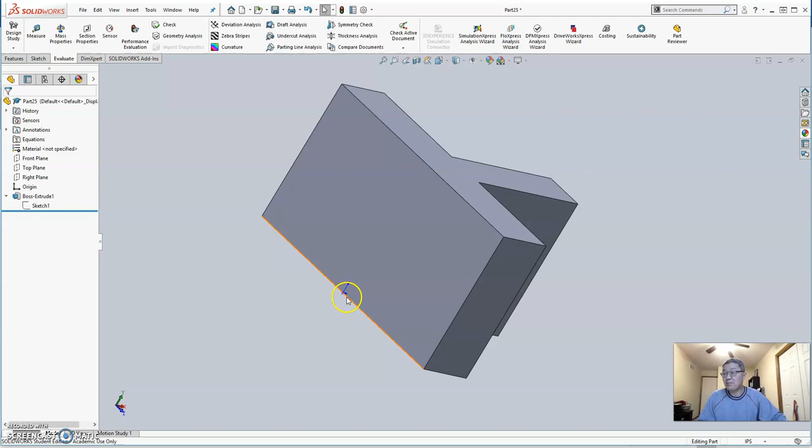This 2.7 is for us to draw this simple block part. As you can see here, the origin is right here, and if I rotate that, you can see the origin is right in the middle of the bottom plane. Once again, if you look at the different display plane type, we're going to choose hidden line removed, and I'll show the isometric view. So this is essentially the object.

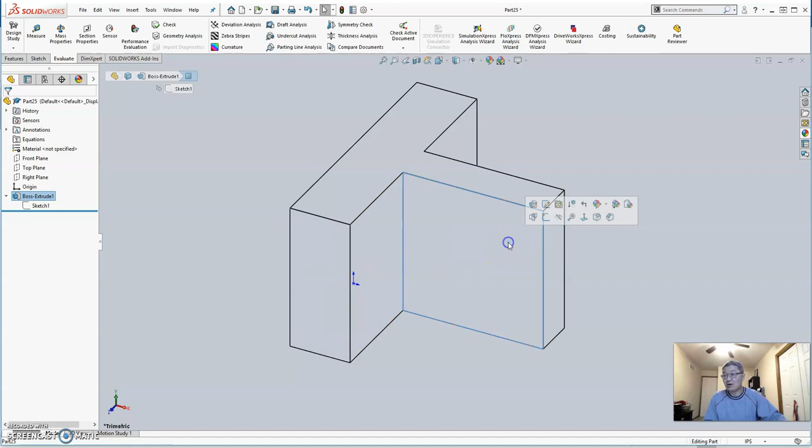In order to make this part, first we need to decide the primary drawing plane. For this one, apparently the top plane is the better one, because if you choose this top plane, all you need to draw this profile, then make one extrude downwards—actually you need to draw the one at the bottom and extrude upwards, so you finish the whole object. Of course you can use the front view, but you need to draw this block, then you need to draw this block, and draw two of them, making sure they're in the right place. So for this particular one, the top plane is a better option.

Let's click new, click part. As we decided, we're going to start from the top plane and make a sketch.

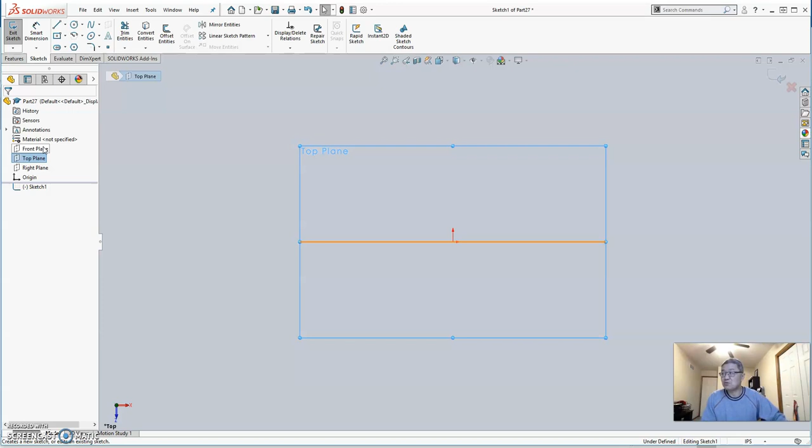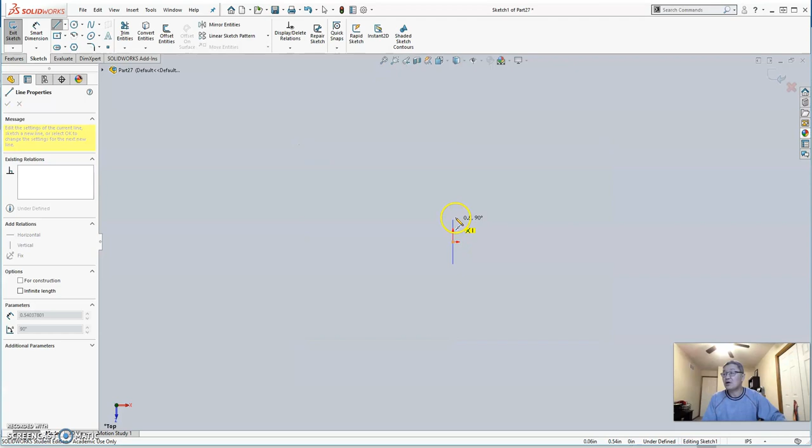Because the origin must be in the middle of that line in the back, if you recall, we're going to click the line command, but before that I want to click the downward arrow and choose this midpoint line, because this line will have a midpoint. We make sure the midpoint is on the origin. Click the origin, then go upwards. If you notice, when I go upwards it also goes downwards, because we chose midpoint line.

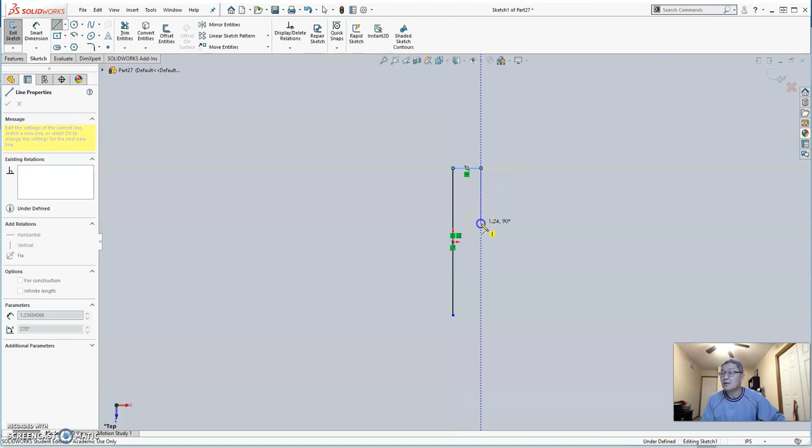Make a second click, then go horizontal, making sure the horizontal yellow bar is there, then go downwards and go horizontal, go vertical again, go horizontal, go downward again. Once again, at this point make sure this horizontal line also shows—that means we draw this point right to the right, then click this point. So we finish our sketch.

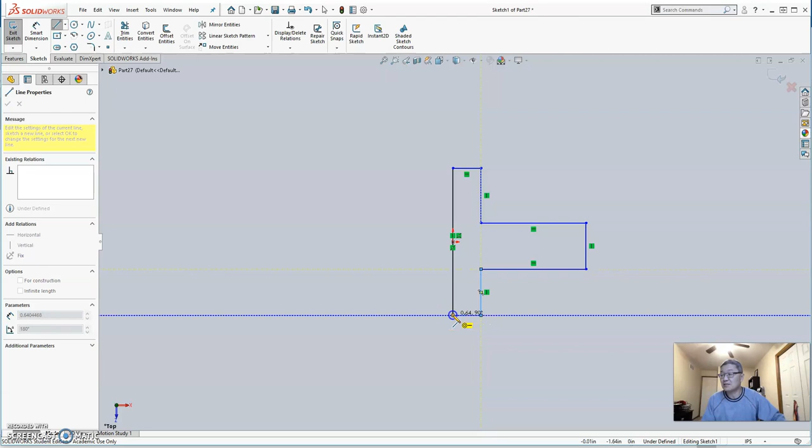Of course, we do not have a dimension yet. Now it's time to add a dimension. Let me use the smart dimension. The dimension for this line is 3.

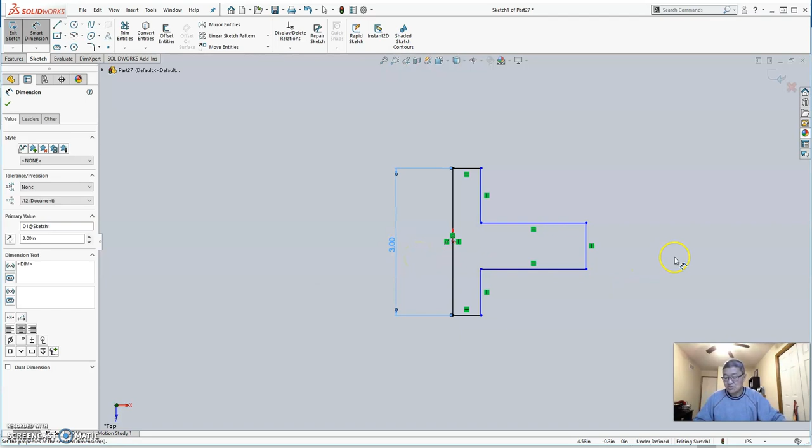And we also need a dimension for this one—it's 0.5. So what is the dimension for this one? We need a dimension for this one too, and keep in mind this object must be symmetric. So the length of this one should be the same as the length of this one.

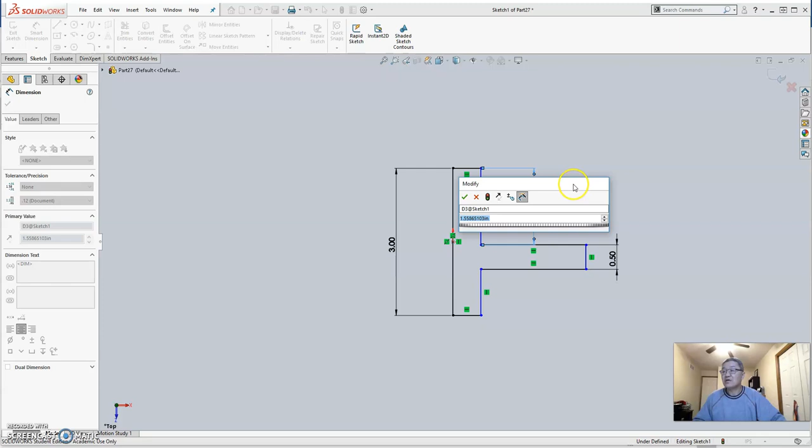So what I do is click the smart dimension, click this line, and put it over here. For this one I want to move this box a little bit upwards, so we're going to ask SolidWorks to do a calculation for us. The length for this one should equal half of this length minus this length. So I'm going to use an equation: put a parenthesis, click this dimension, then minus this number, click this dimension, put a parenthesis, then divide by 2—so that it's symmetric, that is half of the difference. Hit enter. So that's the dimension for that one.

Do we need to input this dimension? No, because we know the total dimension, we know this dimension, we know this dimension—I think we're good. Click the green check. So we're good to go.

Now we need to add another dimension. Use the smart dimension—I want to click this vertical line. We know the distance from here to this line; the total is 2.5. So we click smart dimension, click this line, then click this line, then move downwards.

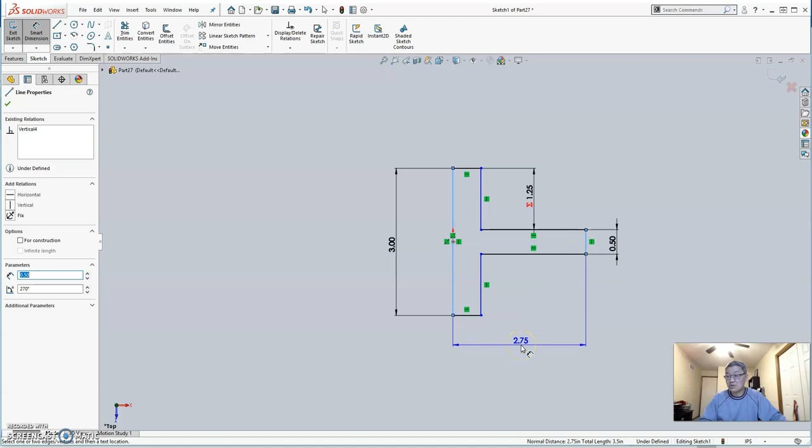So we decide the dimension for these two vertical lines. First click this dimension line, then click this vertical line, then click the second vertical line, then move downwards. For this one, the dimension is 2.5. Now we also need to know the dimension for this one: 0.75.

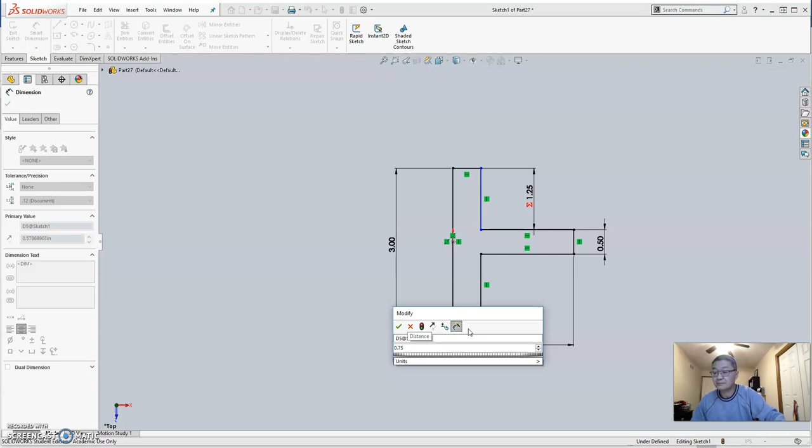If you notice it says undefined, that means we need a dimension for this one: 0.75. Enter. Now it says 'fully defined' in the status bar, so we're good to go.

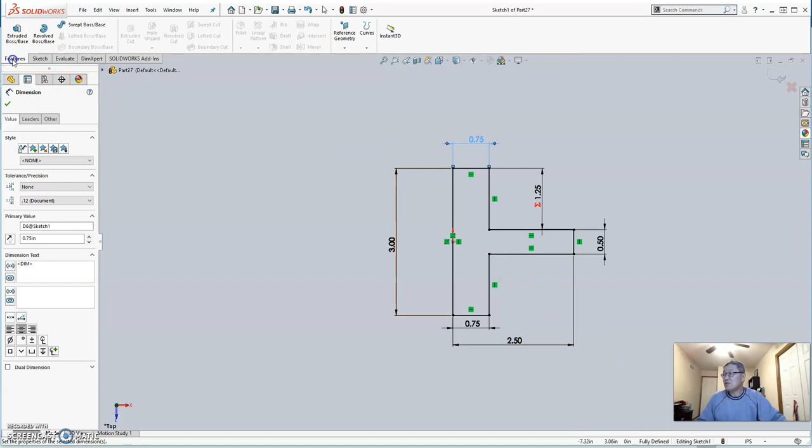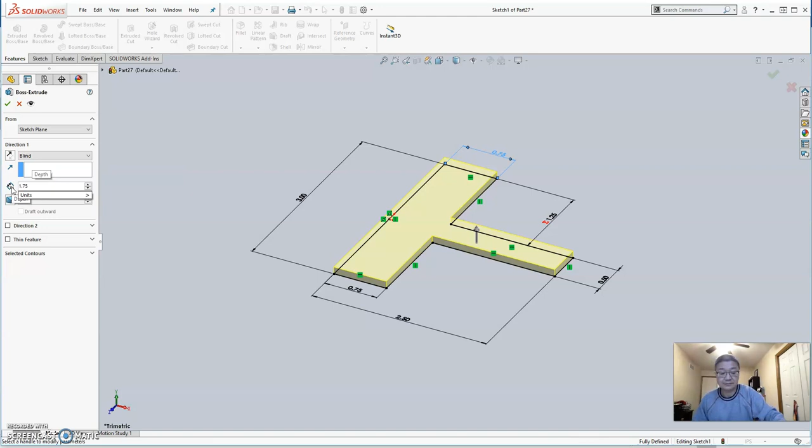We're going to click feature, use the extruded base. For this one we need to extrude it upwards. We choose blind, and the height would be 1.75. Click the green check.

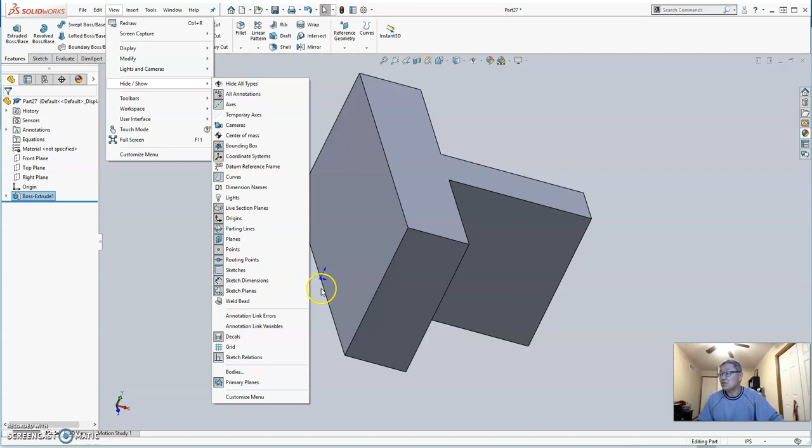So this is good. Once you finish this, hit F on your keyboard to bring it into the center, and if you rotate it, hit your middle wheel and rotate. If you notice the origin did not show, we're going to click view, go to hide and show, and click origin—so it shows the origin right in the back. We make sure we got this object correctly, so we have that showing up.

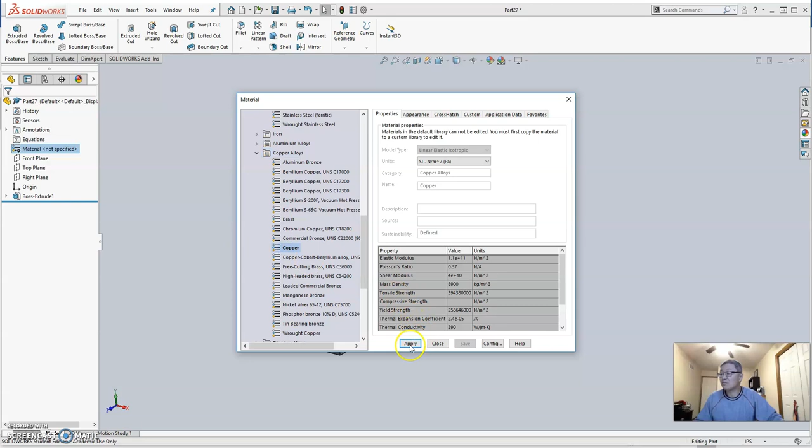The material for this one is copper. We're going to go to material, right click, edit material, go to copper alloy, and you should have copper by itself. Click apply and click close. So this part is made of copper.

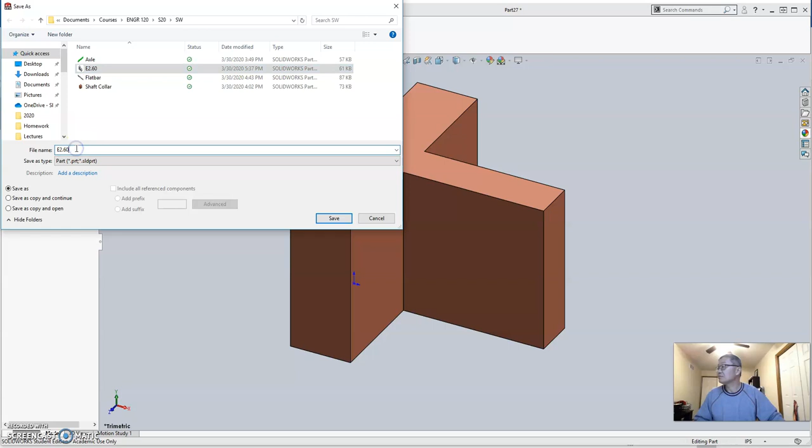Isometric view—so we finish this object. We're going to save this file as exercise 2.60.